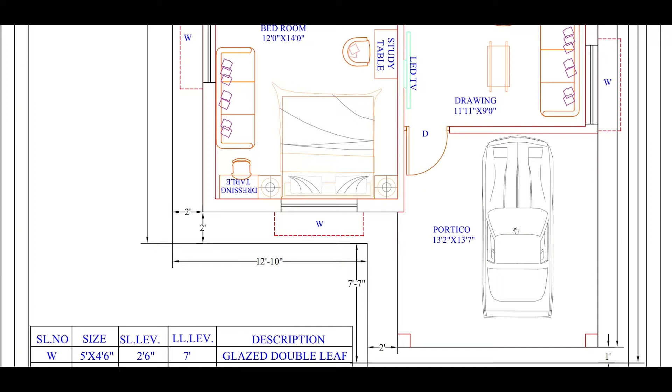Let us now discuss the components of our plan. We have a portico for parking, one drawing room, two bedrooms - one with attached toilet and another common toilet, a double L type staircase, and a kitchen at the ground floor.

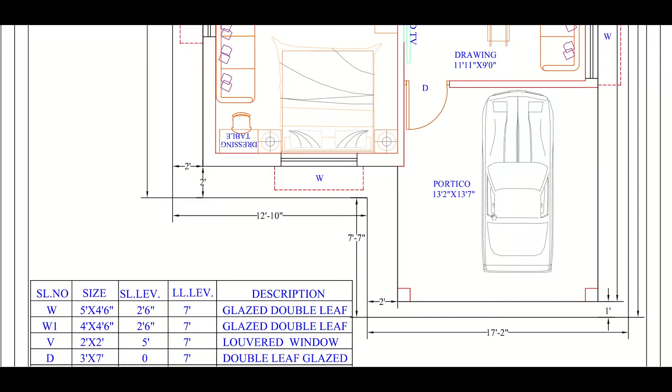The portico is of the size 13 feet 2 inches into 13 feet 7 inches, so we can easily park one four-wheeler of sedan type here, and also two two-wheelers.

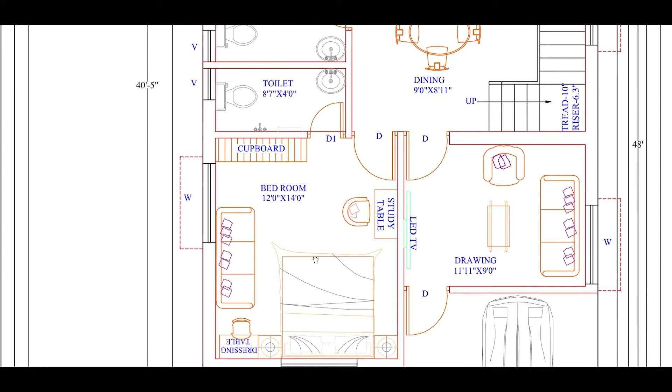We'll have a door of 3 feet width here at the entrance. Now this is our drawing room. As you can see, the privacy of this drawing room is very well maintained, as guests sitting here will not know what is happening inside, because there is a door here, and the persons in the bedroom, dining room and kitchen can do their activities freely. So by purpose of privacy, this plan is well justified.

The persons in the drawing room can sit at this sofa, and we can keep a TV here. This will be the door for the main house, and we can keep the dining portion here and the kitchen here. The size of the kitchen is 11 feet 11 inches and 6 feet, which is sufficient. We also have a window for ventilation purpose.

This bedroom is of the size 12 feet into 11 feet. We have a common toilet here of size 8 feet 7 inches into 4 feet 6 inches.

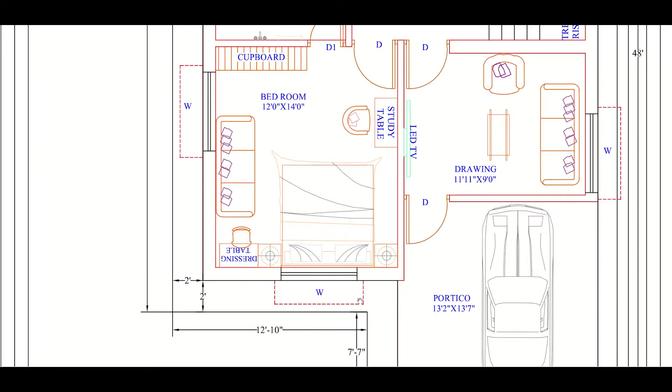Now moving to the master bedroom. This master bedroom is in the southwest direction, which is the best position as per Vastu. We also have two windows here for ventilation. This bedroom has an attached toilet, of size 8 feet 7 inches into 4 feet.

So these were the components of our ground floor plan. Now let us go have a look at our first floor plan. In the first floor also we have a similar bedroom of size 12 feet into 14 feet, same as in the ground floor.

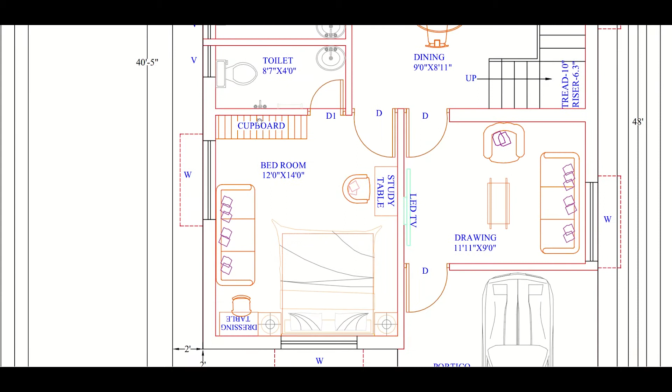So we have this bedroom here. The toilets are also similar to those of the ground floor. This bedroom also is of the same size as the bedroom in the ground floor. We have a puja room here, and its size is same as the kitchen in the ground floor, which is 11 feet 11 inches into 6 feet.

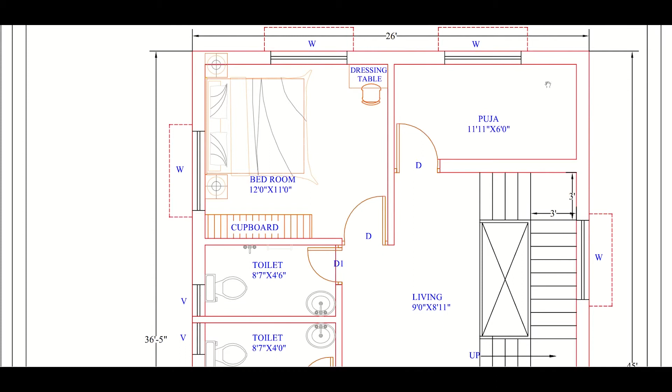Let us look at the direction of this puja room. It is in the northeast direction, which is the best position as per Vastu. We can have the living area here, with a total of 3 bedrooms. In this bedroom, the size will be 11 feet 11 inches into 14 feet.

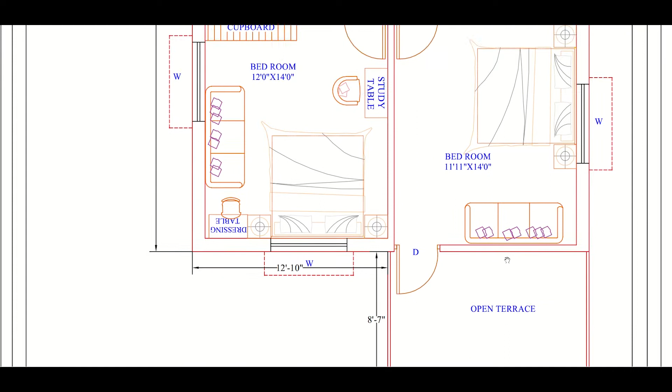We'll have an open terrace here, of size 13 feet 2 inches into 8 feet 7 inches. In this open terrace one can sit freely and relax, and we can conduct house parties or get-togethers here.

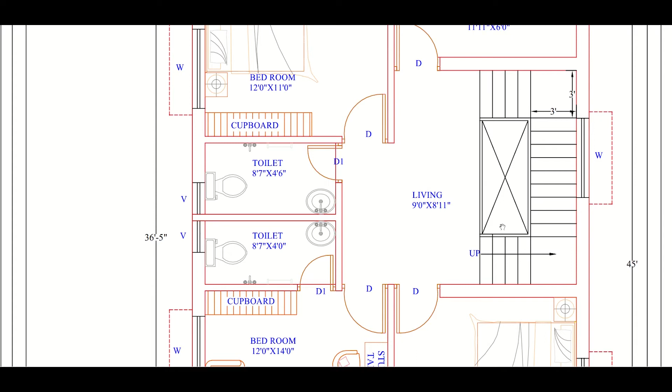So friends, this was our plan. One advantage is that we have an open terrace where we can do barbecue or house parties. Another disadvantage of this plan is that it has a staircase inside our drawing room.

As you can see in the ground floor, the staircase is kept inside, so if the owner wants to give this house for rent, he can't do that easily. Please comment below the advantages and disadvantages of this plan which you observed.

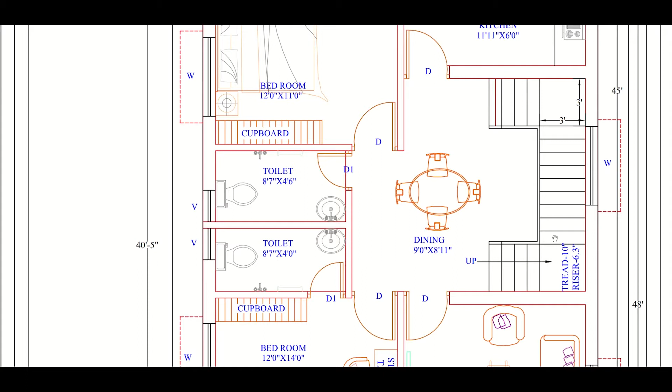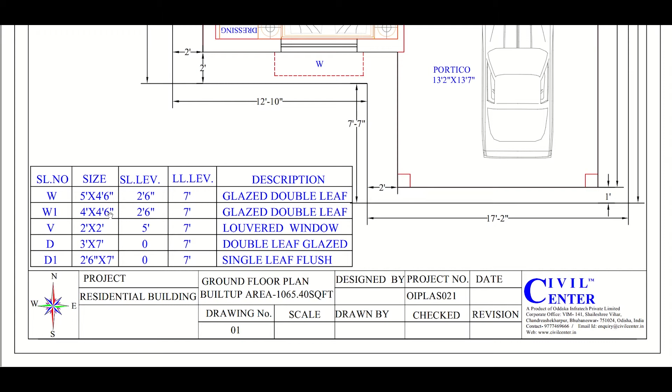Now we'll discuss the size of the doors, windows and ventilators provided. We have two types of windows, W and W1, of size 5 feet into 4 feet 6 inches, meaning the width of the window is 5 feet. In this plan only the width is visible, so the width of W is 5 feet, and the length is 4 feet 6 inches, not visible in this plan. W1 has the same length, but its width is 4 feet.

Let us look at where we have provided W1. As you can see, we have not provided W1 here, and in the first floor also we have not provided W1.

Now moving on, the size of the ventilator is 2 feet into 2 feet. So the ventilators we have provided here are of size 2 feet.

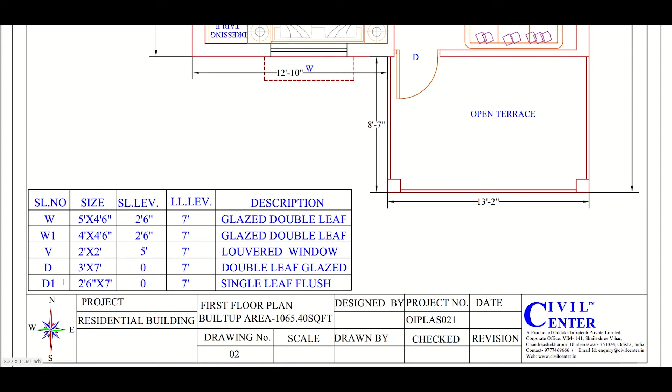Next, the doors we have provided are D and D1. The size of D is 3 feet into 7 feet, and the size of D1 is 2 feet 6 inches into 7 feet. We have provided D here, and D1 at the toilet doors. So the toilet door size is 2 feet 6 inches, and the main door and other doors marked D are 3 feet, with a height of 7 feet for all doors.

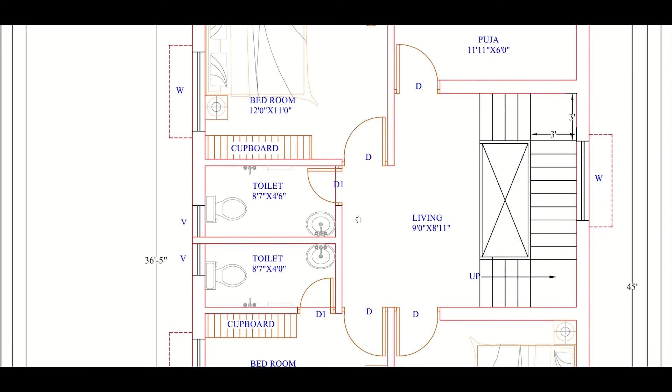So friends, we have discussed a plan for a plot size of 30 feet into 48 feet, which is not exactly rectangular. Bye.